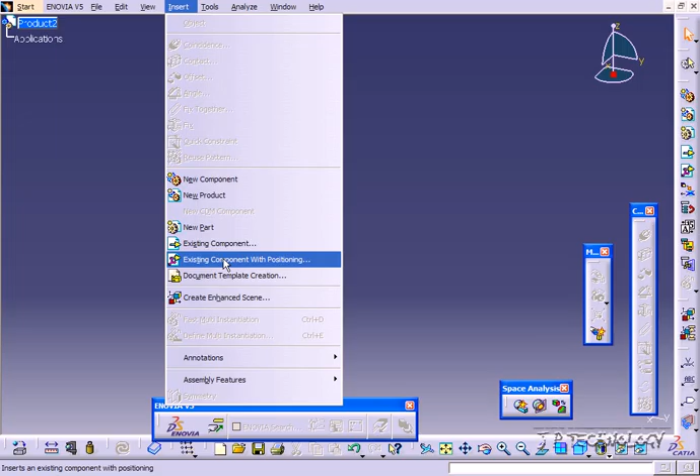So what we're going to do in this tutorial is insert a few of the guitar components, and I'm just going to show you an example of throwing it in with existing and throwing it in with positioning. So let's throw it in with existing, click Existing Component.

Now what you're going to have to do is click the product you want to put it into, so click Product 2 or whatever your product or assembly is called. Now it's going to prompt you to select the part you want to put in. Let's click the base, click OK, and now it's put in the base.

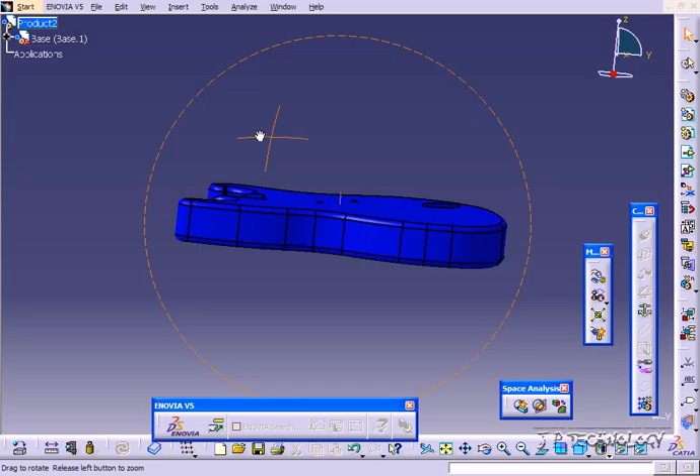Now let's do another existing component. Click Insert, Existing Component, and again you have to click on the product. This time let's put in the plate, click open. Now the plate, as you can see, is kind of layered on top and squished into the base.

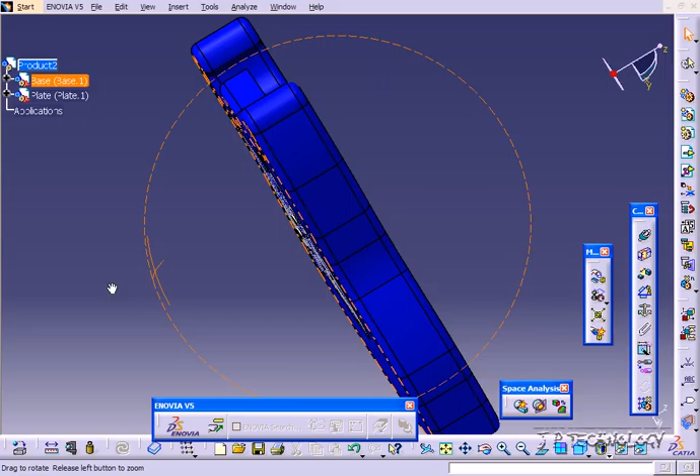So that's one of the problems with doing the existing component just by itself. You're able to throw it in quick, but you don't really have a position to throw it into. So let's delete this plate.

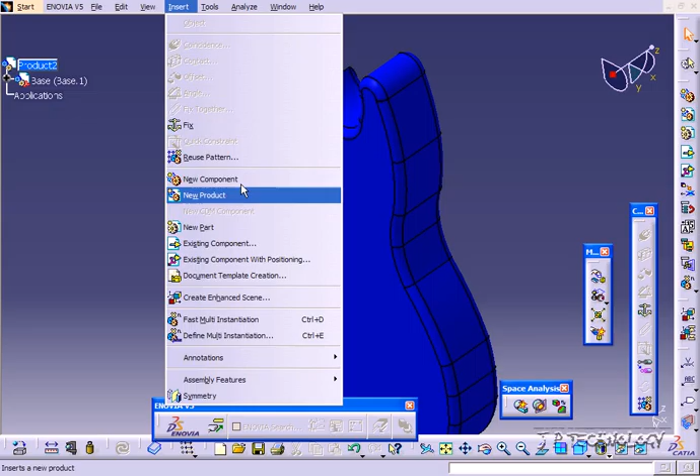Let's do the same thing, but this time we're going to insert it with position. Click Existing Component with Positioning, click the product, click the plate again, click Open, and now you can see again it's in the same position.

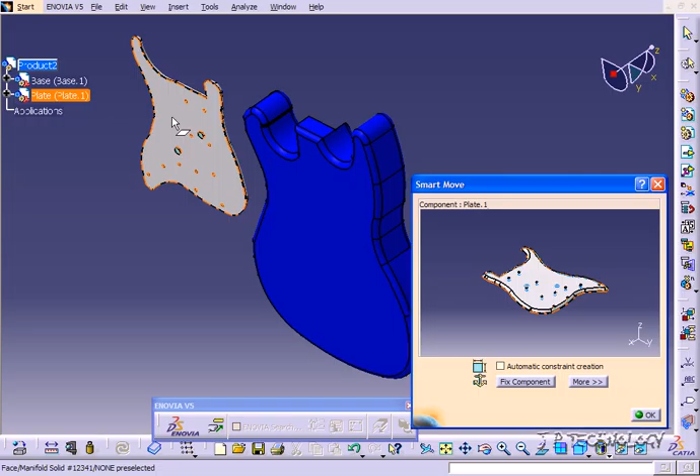It's kind of like the problem we have when inserting components, we're going to have it smushed like that. But what you're able to do is just move it around in here, toss it around, or click on here and just move it around. Once you've done that, just click OK.

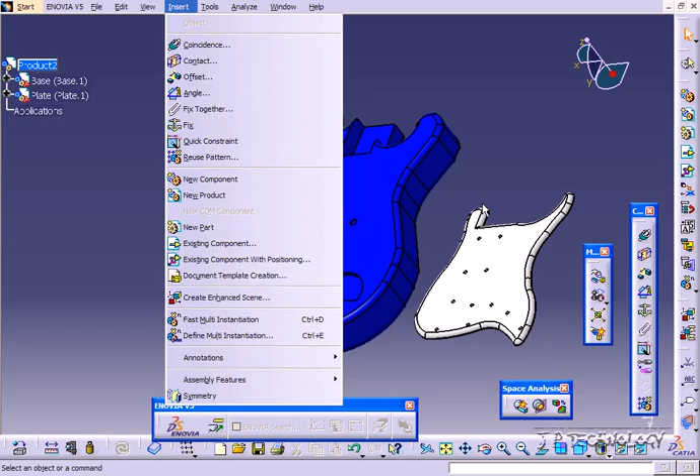Now both of them are free to click, access, and maneuver. So when inserting components, make sure that you click which product you want to put your components into, which assembly, and then from that you have to insert them. You may have to insert with positioning, as we had to here, because we need to move it around from the origin, as both of them share the same space in their own component files. They're going to share the same space in the assembly, so you need to move it around before you actually position it.

And that concludes our tutorial on inserting components within CATIA V5.